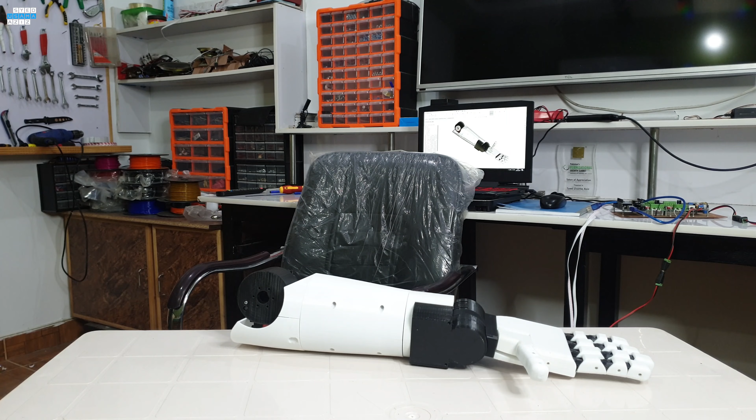This video is in continuation to the first video that you watched on my YouTube channel, which was about a demo of a 3D printed robotic hand. Now I have done a few updates to this robotic hand, and the updates are mainly related to the wrist joint. So I will be discussing that in this video.

The forearm is ready. I had completed it before in the design in SolidWorks, but the problem was that the proper wiring was not defined and electronics was not contained inside this arm. Now it is completely in presentable form. So I thought, why not share it with you people? But before we start our discussion on this robotic arm, let's first have a look at the design.

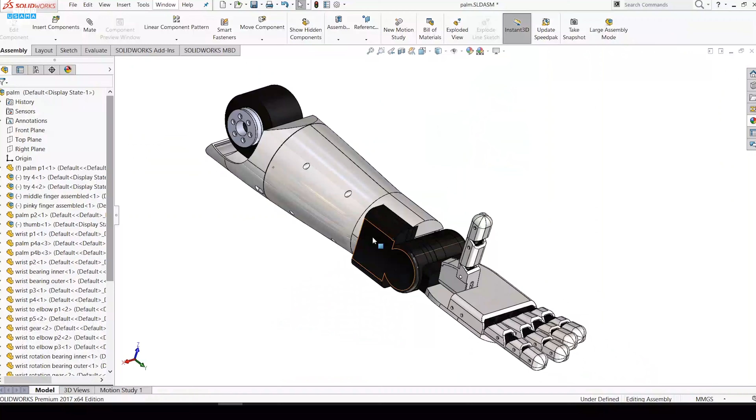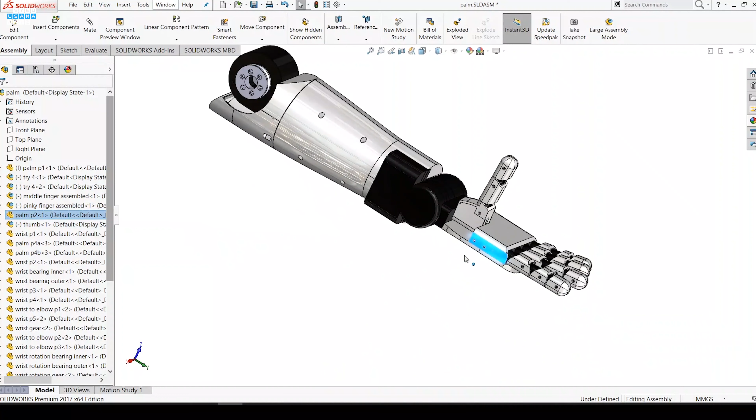This robotic arm is designed in SolidWorks, and you can see here how it looks from the fingers to the elbow. This is the elbow part here, and this is the wrist. This is 3D printed with a lot of small parts which are joined together using nuts and screws. Here I have made an animation using exploded view, which gives you an idea of how different parts are connected together in this robotic arm. So let's have a look at that first.

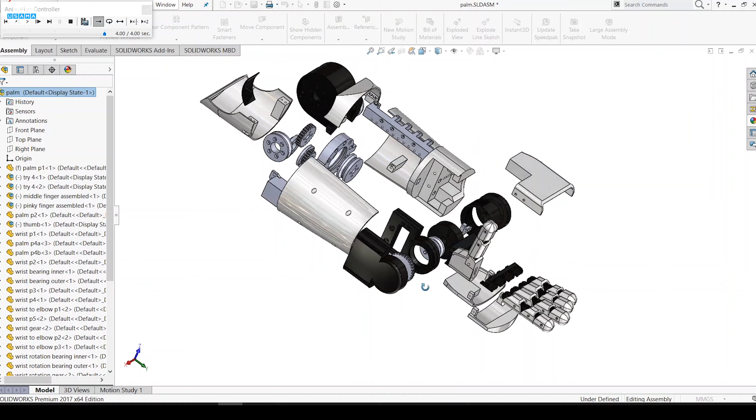So this is the exploded view. Now I wanted to show you this exploded view in an animation. So let's animate the explode. So here you can see there are a lot of smaller 3D printed parts, which are then screwed together, joined together. Most of them serve as its drive, where some of the parts are gears, bearings, and these, after connecting them together, constitute this entire robotic arm.

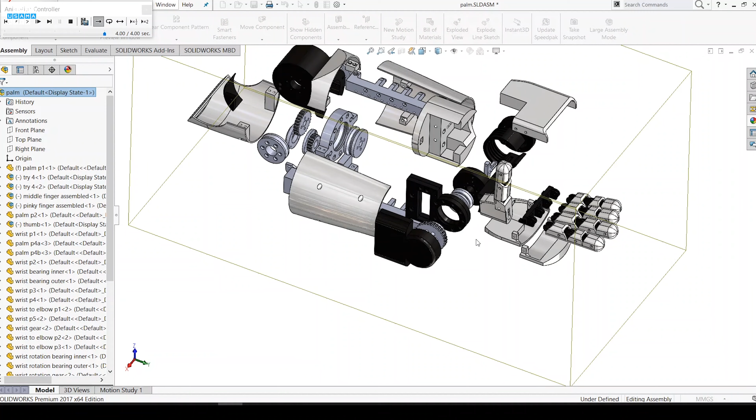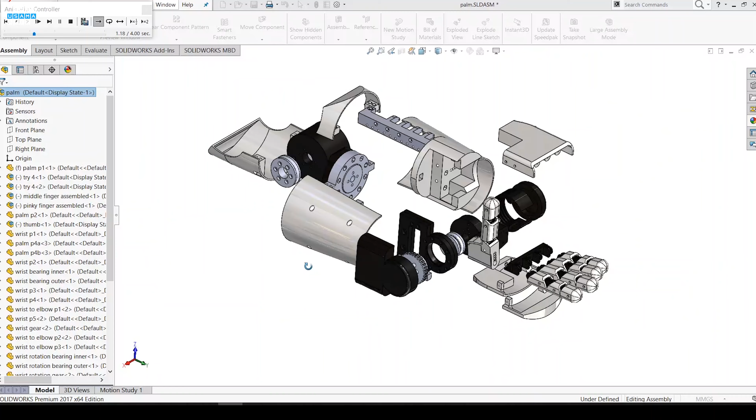I 3D printed and then assembled most of these parts prior to making this YouTube channel. Therefore, it was really difficult for me to reopen it and reassemble it in order to make a video. So I thought this would be a great idea in order to show you how this robotic arm is made. So now I will animate its assembly so that you can again see how it works. Yeah, so this is how this robotic arm is made. Now let's see how it works in real time.

Okay, so let's talk about the first upgrade to this robotic arm. It's in the wrist joint. So this is how the wrist joint works. It starts from this zero position somewhere around here, and then the servo rotates and it gets to its other extreme, which is 180 degrees, to this point.

Now this is very similar to an example of my hand. If you see this hand, it moves from this zero position to this 180 degrees. So these are the two extremes within which I can rotate my wrist joint, and this is my axis of rotation of my wrist joint. Same is the case over here.

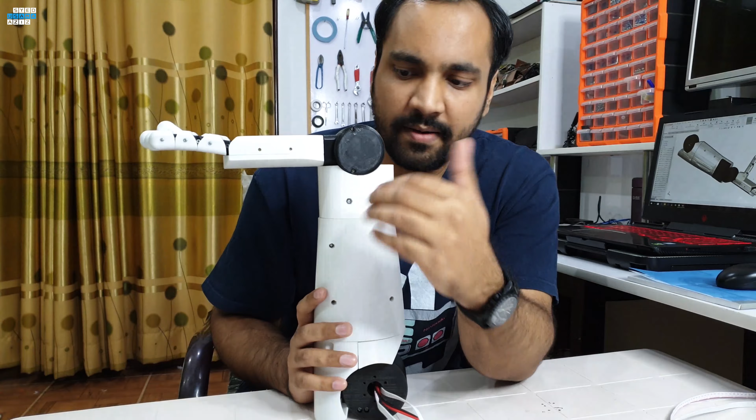This circular area that you see mimics the wrist joint of a humanoid, and imagine that the center of this circle is the axis. So around this it revolves from one extreme. Let's say that this is 0, then it moves to another extreme, which is 180 degrees. The motor in the wrist joint is of 270 degrees. It's a servo motor, and I have done some gear reduction in such a way that it translates the 270 degrees rotation of the servo to 180 degrees of the hand.

Okay guys, so now let's see this joint in movement. I will connect this electronics to the computer. Now it will start moving, first straight, then it will move to the zero position, then 90 degrees, then to the other extreme. So let's see. This is one extreme, 0, 90 degrees, and then to the other extreme, which is 180 degrees. So I've written the code so that it fluctuates between these three motions.

Now there is a servo motor here, which is a 270 degrees servo. There is a gear reduction here, which translates the 270 degrees of the servo to the 180 degrees of the wrist joint. And this is how it works.

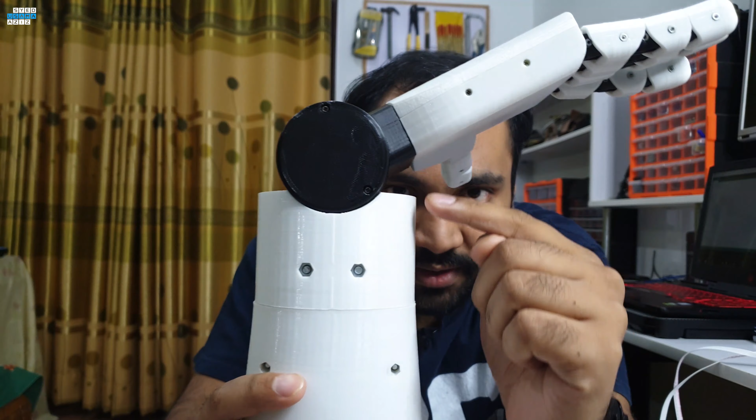Now I wanted to come back to its zero position and show you something. Here you can see there is a gap here, a clearance that I've left. But on the other side, there is no clearance.

There is a reason behind this sort of clearance, and I want you people to think about it, ponder upon it a little while, and let me know your thoughts in the comment section why there is a gap here that I've left. Of course, it is intentional and there is a reason behind it, and I want you to think about it. Okay, so let's move on to the next movement.

The second upgrade to this is again in the wrist joint, and this is located here. The motor for the second axis is here inside this piece, and this allows the entire arm to rotate this way. So you can see that this is the zero position, and imagine that the axis or the axial direction is into the camera, and now it is rotating around that axis.

So this is the other extreme, this is one extreme. I have intentionally blocked its rotation from this one extreme to this second extreme. Now it cannot move forward. And there's a reason behind it, because this is very similar to the motion of our muscle here. With this muscle, we can rotate our wrist to this point, one extreme, and then to this, the other extreme.

To move it further, we need to move another muscle. So we will cover that in a future video, but right now this upgrade translates to the movement of this muscle. So this is the zero position and then going to the 180 degrees. Same movement you can see here. Now let's plug in the electronics and let's see how it works in movement with the help of a motor.